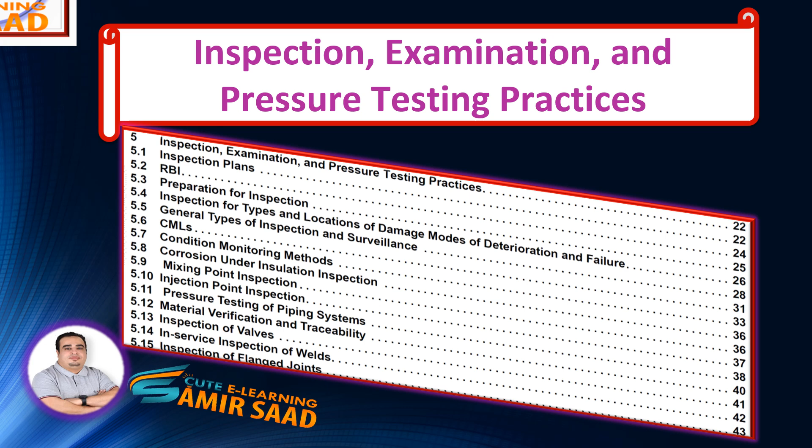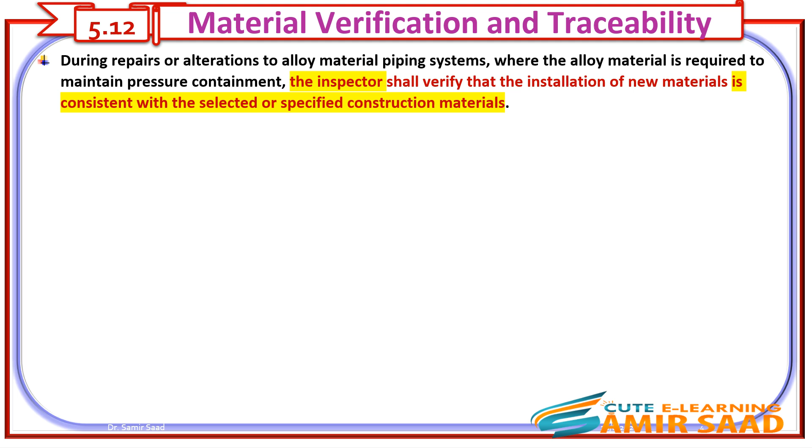Material verification and traceability. During repairs or alterations to alloy material piping systems, where the alloy material is required to maintain pressure containment, the inspector shall verify that the installation of new materials is consistent with the selected or specified construction materials. The owner-user shall assess the need for and extent of application of a material verification program.

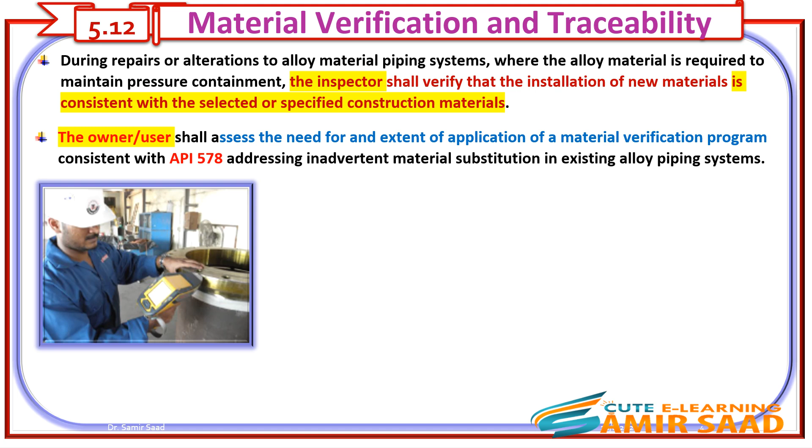This is consistent with API 578, addressing inadvertent material substitution in existing alloy piping systems. The owner-user can make this assessment by 100% verification, PMI examination in certain critical situations, or by a percentage of the materials. PMI examination can be accomplished by the inspector or the examiner with the use of suitable methods.

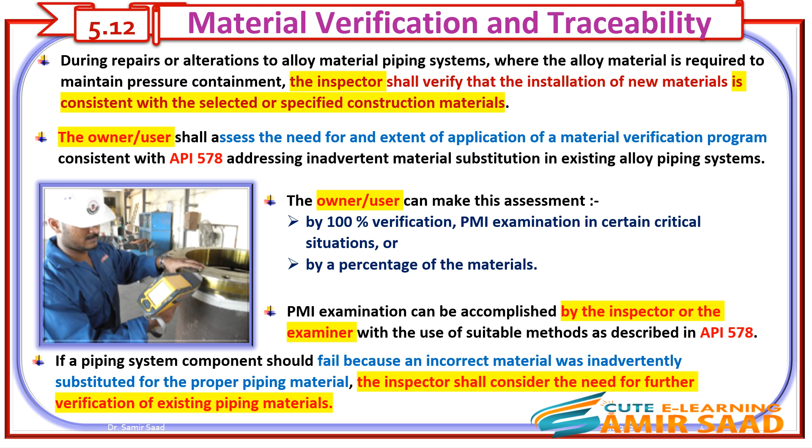As described in API 578, if a piping system component should fail because an incorrect material was inadvertently substituted for the proper piping material, the inspector shall consider the need for further verification of existing piping materials.

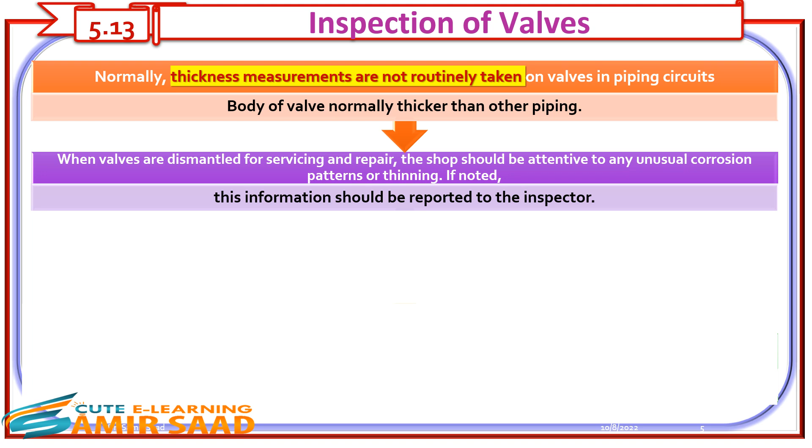Inspection of valves. Normally, thickness measurements are not routinely taken on valves in piping circuits; the body of a valve is normally thicker than other piping. When valves are dismantled for servicing and repair, the shop should be attentive to any unusual corrosion patterns or thinning. If noted, this information should be reported to the inspector.

Bodies of valves that are exposed to significant temperature cycling, for example, catalytic reforming unit regeneration and steam cleaning, should be examined periodically for thermal fatigue cracking.

If gate valves are known to be or are suspected of being exposed to severe or unusual corrosion erosion, thickness readings should be conducted on the body between the seats, since this is an area of high turbulence and high stress.

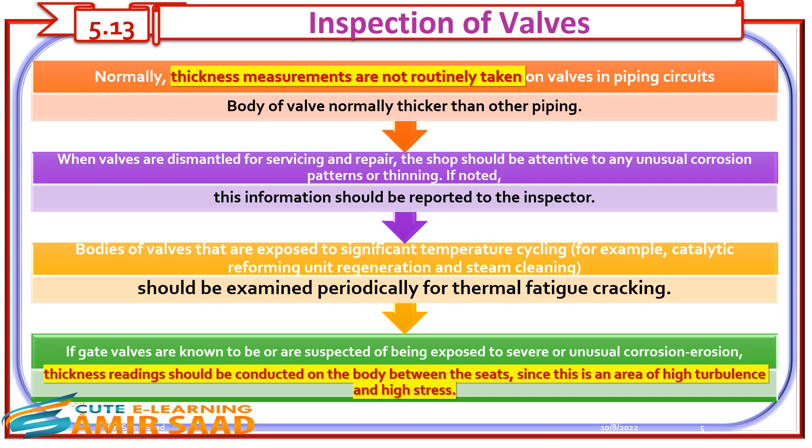Control valves or other throttling valves, particularly in high-pressure drop and slurry services, can be susceptible to localized corrosion/erosion of the body downstream of the orifice.

If such metal loss is suspected, the valve should be removed from the line for internal inspection. The inside of the downstream mating flange and piping also should be inspected for local metal loss.

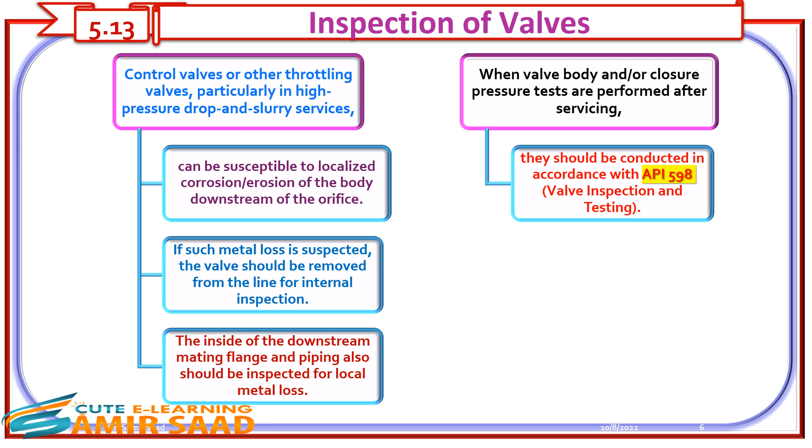When valve body and/or closure pressure tests are performed after servicing, they should be conducted in accordance with API 598, Valve Inspection and Testing.

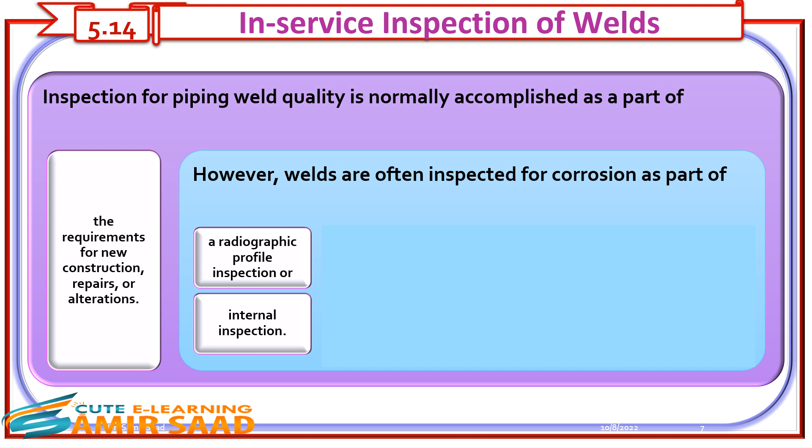In-service inspection of welds. Inspection for piping weld quality is normally accomplished as a part of the requirements for new construction, repairs, or alterations. However, welds are often inspected for corrosion as part of a radiographic profile inspection, or internal inspection, when preferential weld corrosion is noted.

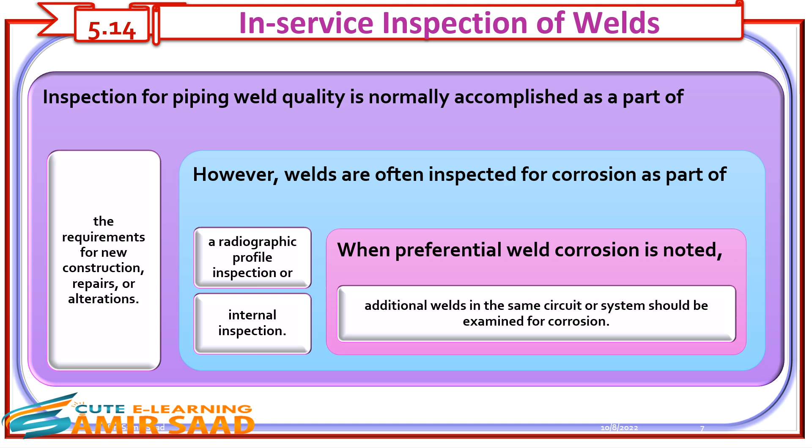Additional welds in the same circuit or system should be examined for corrosion. Radiographic profile examinations of welds that have been in service may reveal a flaw in the weld.

If crack-like imperfections are detected while the piping system is in operation, further inspection with weld quality radiography and/or UT should be used to assess the magnitude of the imperfection.

Additionally, the inspector should make an effort to determine whether the crack-like imperfections are from original weld fabrication, or may be from an environmental cracking mechanism.

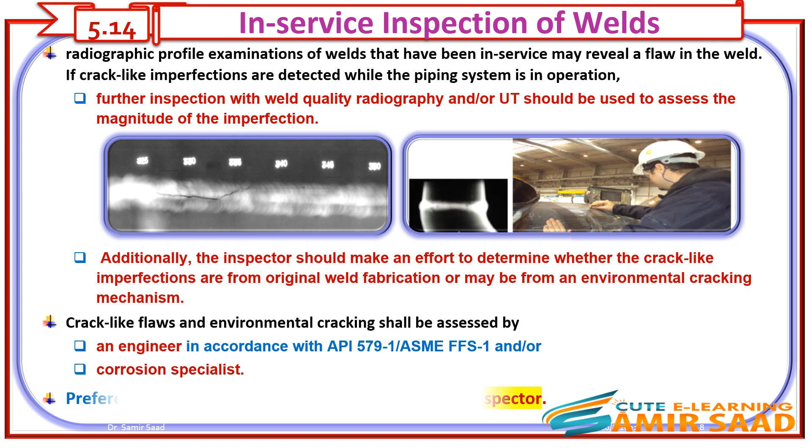Crack-like flaws and environmental cracking shall be assessed by an engineer in accordance with API 579-1, ASME FFS-1, and/or a corrosion specialist. Preferential weld corrosion shall be assessed by the inspector.

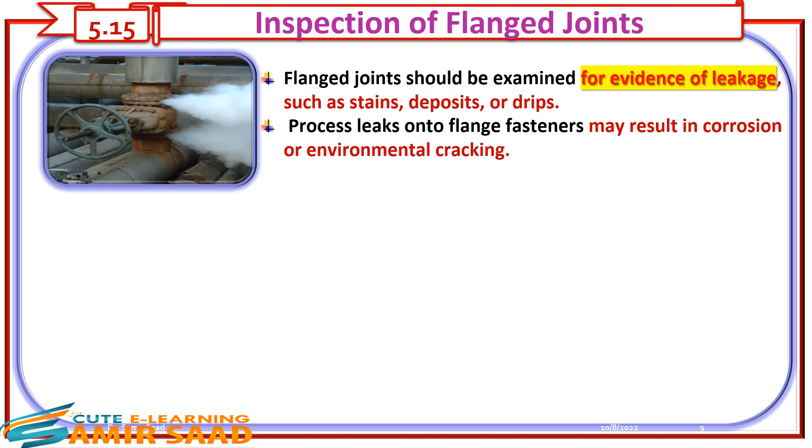Inspection of flanged joints. Flanged joints should be examined for evidence of leakage, such as stains, deposits, or drips. Process leaks onto flange fasteners may result in corrosion or environmental cracking. This examination should include those flanges enclosed with flange or splash and spray guards.

Flanged joints that have been clamped and pumped with sealant should be checked for leakage at the bolts. Fasteners subjected to such leakage may corrode or crack, for example, caustic cracking. If re-pumping is contemplated, affected fasteners should be renewed first.

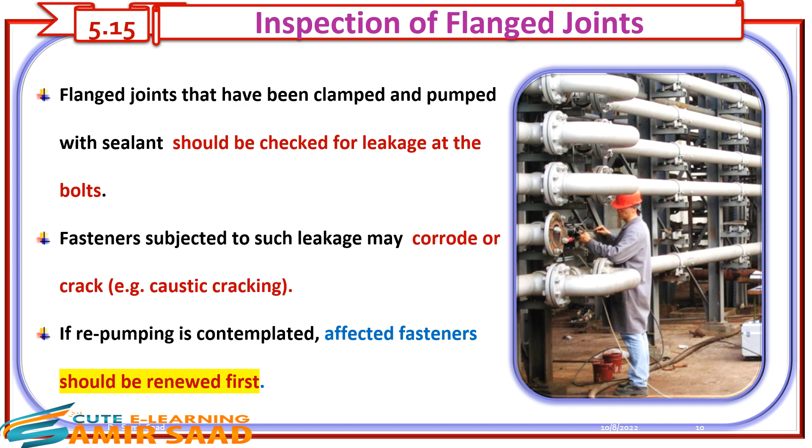Accessible flange faces should be examined for distortion and to determine the condition of gasket seating surfaces. If flanges are excessively bent or distorted, their markings and thicknesses should be checked against engineering requirements before taking corrective action.

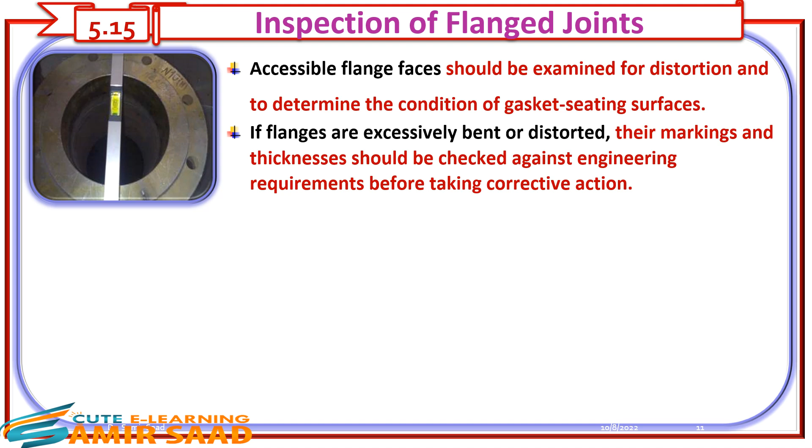Fasteners should be fully engaged. Any fastener failing to do so is considered acceptably engaged, if the lack of complete engagement is not more than one thread.

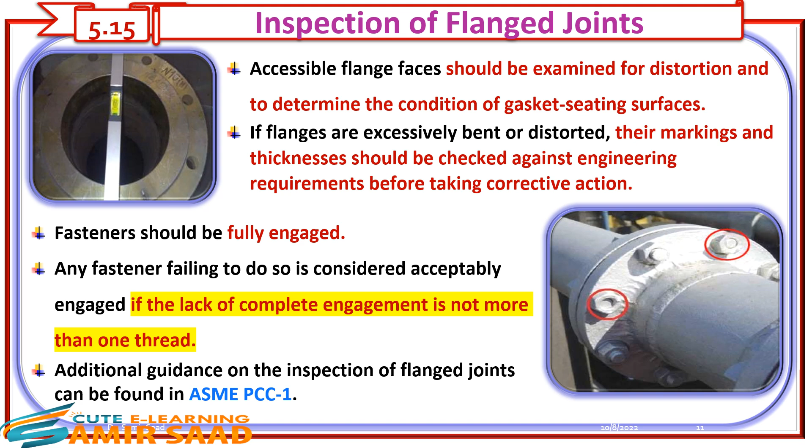Additional guidance on the inspection of flanged joints can be found in ASME PCC-1.